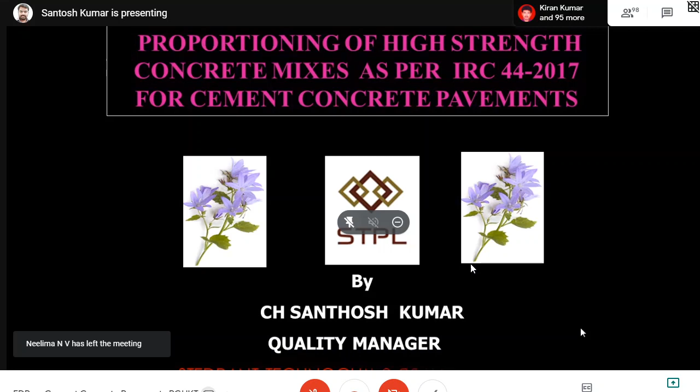Now, I would like to start the presentation with a statement saying that pavements can withstand wheel loads with good quality construction, even though there is marginal deficiency in design. But good design cannot prevent failure of pavements if construction quality is poor.

There are some Indian Road Congress standards related to cement concrete pavements: IRC 15, which deals with the code of practice for construction of jointed plain concrete pavements; IRC SP 46, which provides guidelines for design and construction of fiber reinforced concrete; IRC SP 76, related to white topping; and IRC SP 70. Why have I added this? Because the National Highway Authority of India and Indian Road Congress are permitting self-compacting concrete in the construction of bridges. Then why can't we use self-compacting concrete in pavements, especially when it is a fixed form pavement?

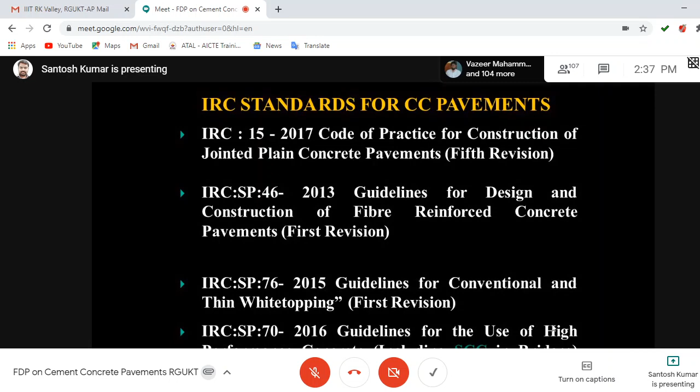Coming to the recent Indian standards related to concrete, published between 2018 and 2020: IS 1199, parts 1 to 7, relate to fresh concrete and hardened concrete testing. You can test for sampling, consistency, density of concrete, air content, making and curing of test specimens. Tests on self-compacting concrete have been introduced, and also the setting time of concrete.

Let me make one thing clear: setting time of cement is completely different, done as per IS 4031. Setting time of concrete is done as per IS 1199 part 7, where you measure the penetration resistance, and based on that penetration resistance, you fix the setting time of the concrete.

IS 10262, the concrete mix proportioning guide, had its second revision published in 2019. One more thing to add is, whenever a new standard is published, the previous standard is subsequently withdrawn. Always follow the new standard when it is published.

You have the water permeability test as per IS 516 in 2018, and IS 516 part 4 for testing of concrete cores. When it comes to pavement quality concrete or cement concrete pavements, concrete cores play a vital role. And IS 516 part 2 section 2...

This was published in the year 2020, dealing with the initial surface absorption test of concrete. And IS 516 part 6 covers drying, shrinkage and moisture movement of concrete, which can also be verified in laboratories.

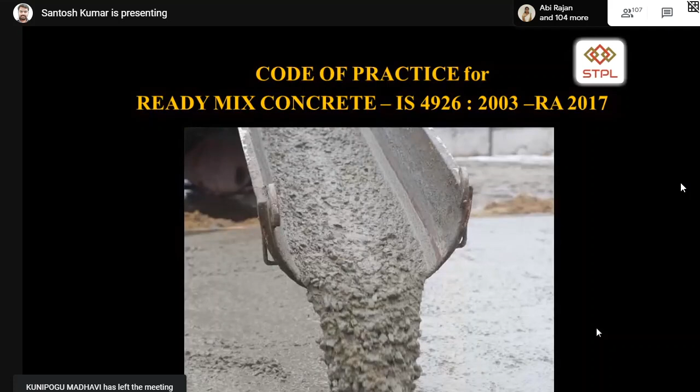Before we talk about high strength concrete, I would like to emphasize ready mix concrete, which is the main source of concrete nowadays for all highway projects, especially dealing with PQC. There is a standard covering the code of practice for ready mix concrete, IS 4926, published in 2003 and reaffirmed in 2017.

So there are some requirements of an RMC plant. Let us see what they are: resource management, plant and equipment, laboratory, key personnel, control on quality of incoming materials, concrete mix design, production and delivery, maintenance, complaints and feedback. These are the main requirements of an RMC plant, and they should have control over all these areas.

Let me give an example of a complaint. When I was auditing an RMC plant in Hyderabad, certified by the Quality Council of India for RMC 9000 capability certification, I looked at the feedbacks and complaints. Most customers write that shrinkage cracks were observed. The complaint is written and recorded in the document.

What the RMC agencies do is write the solution at the bottom: early curing not done by the client or contractor, and because of that, cracks were observed. However, suggestion is given, rectification is done, and the complaint is closed. This is what they write in most of the RMC plants.

But I seriously say this complaint should be taken from another point of view. You should do a root cause analysis - whether there is a deviation in your concrete, or whether it's a problem with the contractor. We have to educate the contractor that early curing must be done, proper measures of damping the surface of the concrete shutter and other things have to be informed to the client. It is our responsibility to ensure there is no complaint related to our RMC.

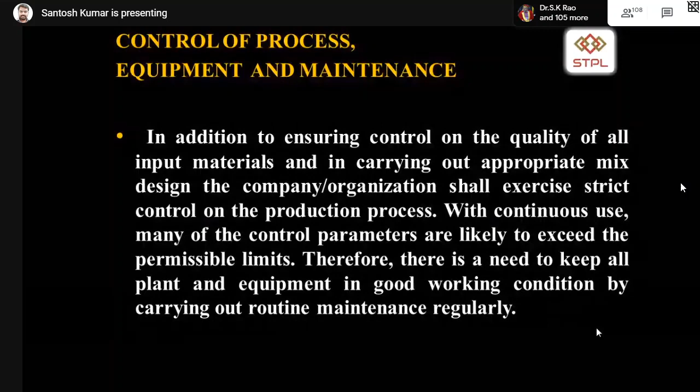There are some requirements for process, equipment and maintenance. In addition to ensuring control on the quality of all input materials and carrying out appropriate mix design, the organization shall exercise strict control on the production process. With continuous use, many control parameters are likely to exceed the permissible limits. Therefore, there is a need to keep all plant and equipment in good working condition by carrying out routine maintenance regularly. Now, if you look into the MoRTH, Ministry of Road Transport and Highways, 5th revision, there is a clause provided in MoRTH 602.

What are the requirements a batching plant should have? A batching plant shall have minimum 4 bins for aggregates, and automatic weighing devices, which are calibrated load cells, should be available.

If you look at IS 4926, the accuracy for water, cement, and aggregates are different, and the MoRTH standard is different too, with more stringent guidelines. Accuracy means if you weigh 100 kg of cement, the tolerance should be plus or minus 1%, it should not deviate more than that. So for cement, admixture, and water weighing, it should be plus or minus 1% accurate. And for coarse and fine aggregate, plus or minus 2% is permissible.

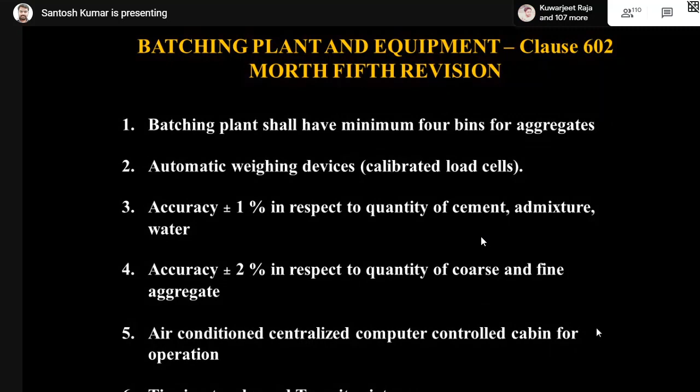An air conditioned, centralized computer control cabin is required for operation of the batching plant. And you should have tipping trucks as well as transit mixers.

Now let me tell you how calibration is verified by an agency. Out of 100 batching plants, 99% are calibrated by the manufacturer. But are we sure the manufacturer is doing the correct calibration of the plant or not? That's why few agencies employ third-party calibration verification agencies. We deploy an engineer at the site, the actual loads applied in the batching plant and the readings observed are noted, and the error is calculated. Only if it is well within the permissible error is the calibration certificate issued.

Tolerance as per IS 4926 is high, plus or minus 3% for aggregates, but as per MoRTH it is only plus or minus 2%. So each standard has its own specifications. For aggregate weighing systems again it's 3%, and for cement weighing system it is 2% here, but as per MoRTH it is only 1%. Then there's water and chemical admixture.

There are a lot of deviations in water and chemical admixture weighing. This is the most important area. When calibration is done, we have to focus more on dispensing of chemical admixtures.

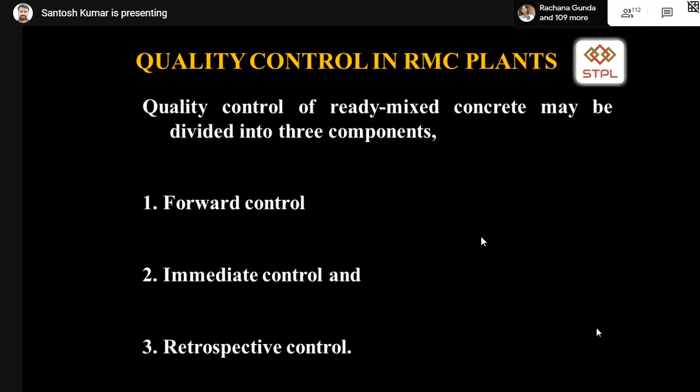Coming to quality control in the RMC plant, there are 3 components: first is forward control, second is immediate control, and third is retrospective control. Let us see what each one is.

Forward control deals with control of purchased material quality. That means never go by brand, sir. Even a centralized, Pan-India presence RMC has appointed Katrina Kaif as their brand ambassador. You don't require brand ambassadors for an RMC plant. You need a proper quality control guy who can maintain your plant. So don't ever go by the brand or the brand ambassador, always test and then approve.

Take the case of legendary cricketer VVS Lakshman, he holds a steel bar and says this is as good as me. But when you test it in the laboratory, it may fail, and sometimes it fails in our laboratory too. So never go by brand. Always ensure all incoming raw materials are tested as per standards and meet the specifications. Only then do you have control on purchased material quality.

Next is control on material storage. Storage plays a vital role in the performance of concrete, we will see in the next slide how storage plays a major role. Then comes mix design and records.

Some batching plants can reset the inputs of the ingredients in the concrete and take a printed batching sheet. But MoRTH, Ministry of Road Transport, doesn't allow a plant which can reset the weights in the batching sheet. So whatever is the actual design should be given in the delivery challan.

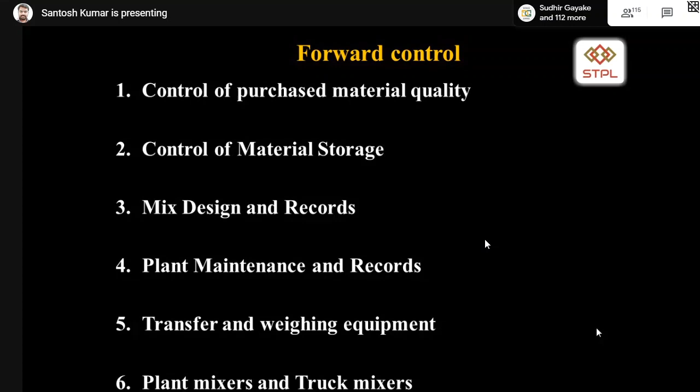Plant maintenance and records cover transfer and weighing equipment, dealing with many kinds of equipment in the plant, mixers, and truck mixers.

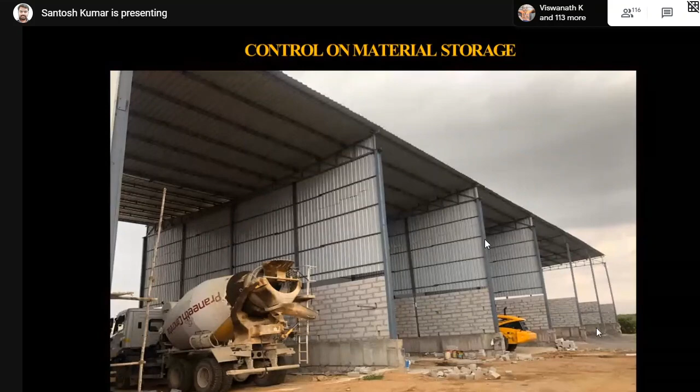This is when I went to an audit of an RMC plant. I suggested that the aggregate should be stored under controlled conditions. This is new, it is under construction. He has provided different compartments for different aggregates. It should be stored in this condition.

Coming to the temperature of aggregates, if you allow the aggregates to rest under direct exposure to sunlight, the temperature may shoot up to 60 to 70 degrees on a hot summer day. This aggregate is mainly basalt, and at an ambient temperature of 40 degrees, the basalt aggregate stone was having a surface temperature of 63.1. If you take the case of granite, ambient temperature was only 40, but the temperature of the aggregate was 54.1. That means based on the type of aggregate, the surface temperature will vary.

He installed the batching plant, and on day one when they started the concrete, they did the trial in the batching plant, and the slump observed was 0. But my mix design report says slump observed is 175 mm. Immediately they added an increased dosage of admixture, and they also increased the water dosage, even though there was 0 slump.

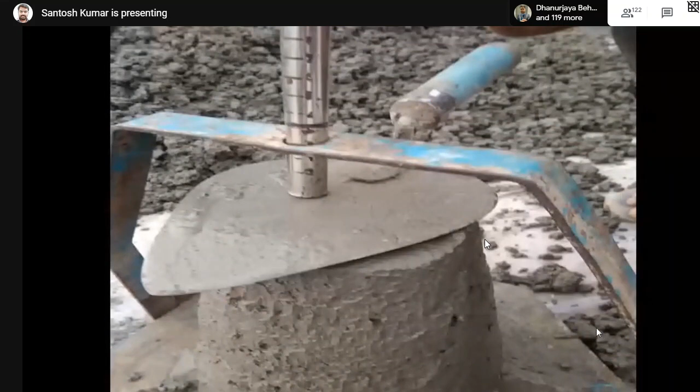Before the concrete is placed at the site, immediate control deals with the mixing and the check for temperature and slump. When it comes to the temperature of concrete, if the fresh concrete temperature is below 25 degrees, the transit time can be up to 120 minutes. If it is above 29 degrees, the transit time should be only 90 minutes.

This is written in the standard. The temperature of concrete plays a vital role, and as per the RMC code, the maximum transit time for concrete is 2 hours when there is no admixture. But if you have any admixture, you can increase it, provided you maintain proper quality control on the concrete. This is a photograph of pavement quality concrete (PQC) being dumped in front of the paver.

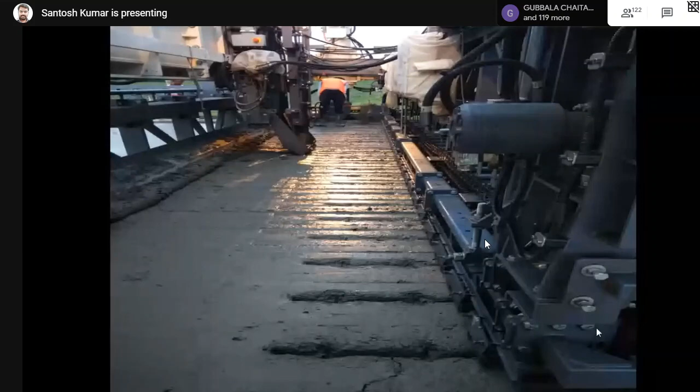It is fed with the backhoe loader, generally called JCB, but technically a backhoe loader, which feeds the concrete into the paver. This is how automatic insertion of dowel bars into the concrete takes place, and this is how the finishing is done. I wanted to show you a video of how the concreting is done, slowed down. It may make a lot of noise because of the paver, so please reduce the volume.

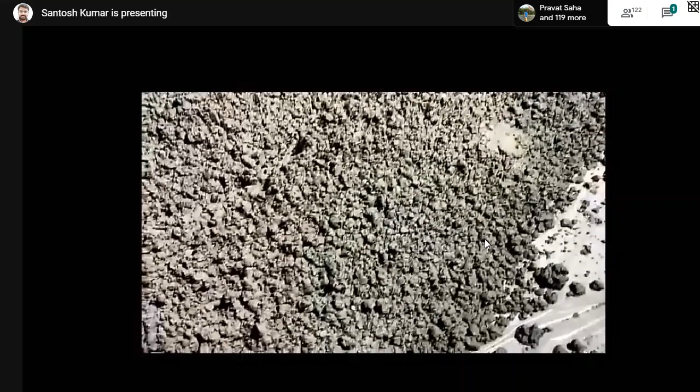This is how the fresh concrete of PQC looks like - very cohesive, and the slump recorded will be around 25 plus or minus 15 mm, not more than that.

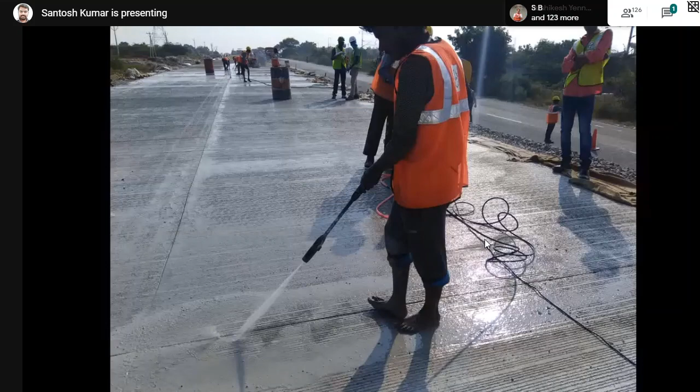This is how the process of finishing concrete is done. On the back side, you can see there is a texturing machine which comes and applies the texture by its own means. You can see here the contraction joints are cut and it is cleaned.

The joints are then filled with sealants, of which there are 3 kinds: polysulfide sealant, polyurethane sealant, and silicone sealant. Filling shall not be done before 21 days of age of concrete - only after 21 days are you supposed to fill the joints using sealants.

After immediate control, we move into retrospective control. Retrospective control is concerned with those factors that influence concrete quality control which cannot be assessed at the time of production. For example, the 28 days strength result - we cannot assure this while producing the concrete, we just predict what the strength would be. This comes under retrospective control, and handling of complaints also comes under retrospective control.

As mentioned by Dr. Surendra Singh sir on the first day of the presentation, the flexural strength is done on a 4-point loading system. This is the flexural testing machine available with our laboratory - it's a 4-point loading system, used for the flexural strength of concrete.

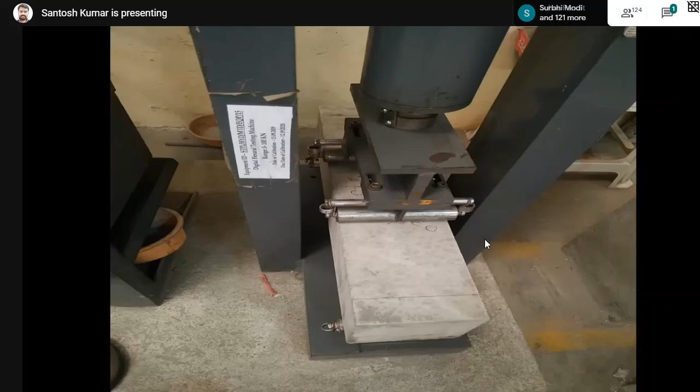The delivery ticket of the RMC should contain many parameters: name, serial number of the ticket, date, truck number, name of the purchaser, name and location of the site, grade of concrete, workability, minimum cement - everything should be mentioned in the delivery challan. Now coming to the recent developments in the concrete industry.

People are expecting high early strength for precast structures. You can see this is M70 grade of concrete with 470 cement. We have deviated from the standard because the designer is not from India and doesn't want to restrict cement content to 450. So based on customer request, we used cement content of 470, and Alcofine we used 100. The water cement ratio was only 0.20 for this grade of concrete.

Imagine, the 24 hour compressive strength was 57.8 Newton per mm square. The request was only 50 MPa, we gave 57.8 MPa at the end of 24 hours. At the end of 36 hours, it was 68.1. At 7 days, it was 82. And at 28 days, it was 96.4.

Let me tell you one thing, sir - for this grade of concrete, the highest recorded compressive strength in our laboratory is 125 Newton per mm square. So high early strength concrete is the order of the day.

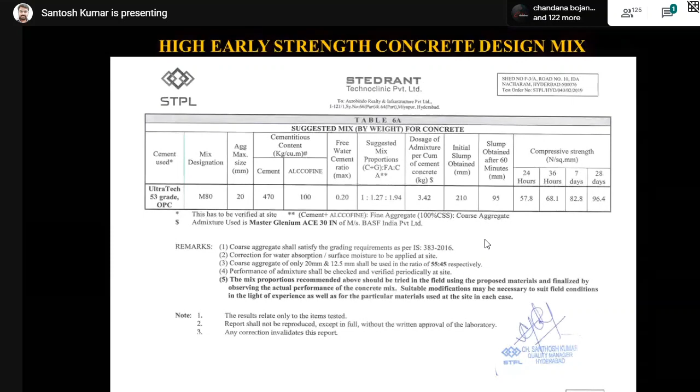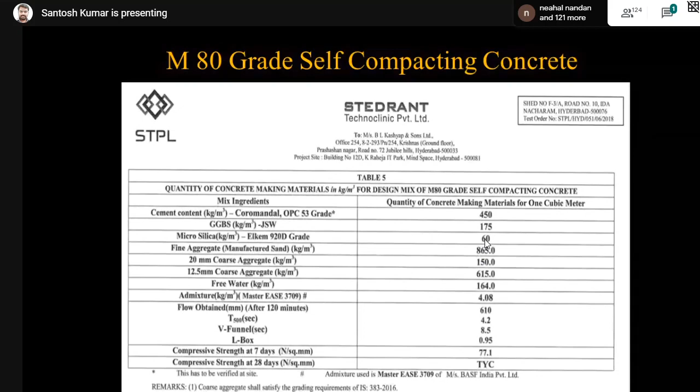The flow should look like a full moon and there should not be any bleeding and segregation.

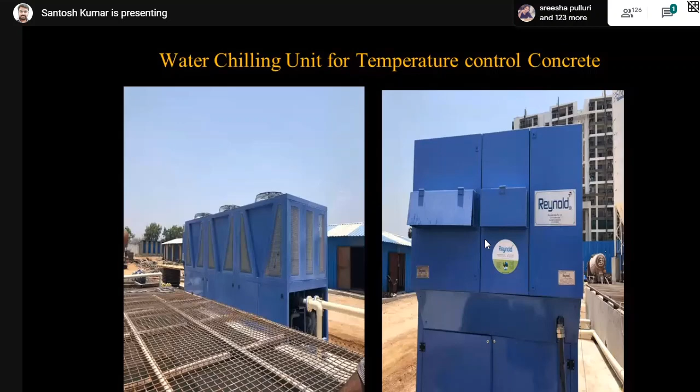Coming to advancements in concrete, people have started using water chiller units, keeping in mind the heat of hydration and temperature rise in concrete. The cost of this chilling unit is around 25 lakh rupees. Temperature monitoring inside concrete has also developed, because if you use pure OPC for at least M40 grade concrete, the temperature inside the core concrete may shoot up to 100 degrees. So monitoring the temperature of concrete has also taken on importance.

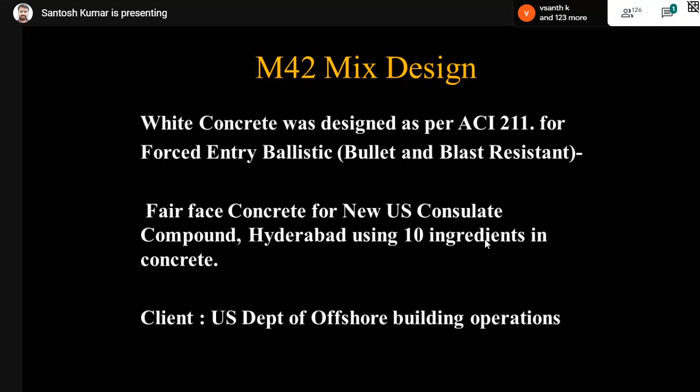You can see the mix design we designed for the US Consulate in Hyderabad. White concrete designed as per American Concrete Institute 211. This is fair face concrete, meaning no plastering and painting. It's white concrete made with 10 ingredients, for forced entry ballistic resistant walls, which we call FEBR walls. If you fire a bullet or missile, the concrete will not collapse, it remains intact. The client is the United States Department of Offshore Building Operations, and this is the mix design.

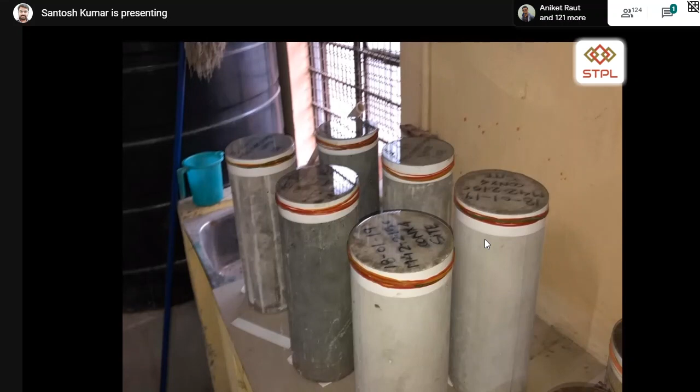We used grey cement, white cement, titanium dioxide, fine aggregate, 19mm and 9mm aggregate, and admixtures like waterproofing chemicals and corrosion inhibitors - many things in one single mix design. You can see the cylinders on the right side of the photograph; the white concrete looks fair enough that there is not even a single pop out on the cylinder sample. This is how the concrete was constructed at the US Consulate in Hyderabad.

When dealing with high strength concrete, in addition to the tests specified in IS 383, suitability of the source of aggregates has to be verified and unconfined compressive strength of rock should be measured. Why? Because some sources of aggregates may have unconfined compressive strength below 60, even though it is granite. If you use such aggregates in high strength concrete, the aggregates may get crushed. So UCS of rock is very important.

Petrographic examination, to see the total structure of the rock, needs to be done under a microscope, and alkali aggregate reactivity tests are also suggested.

The behavior of chemical admixtures, especially in high strength concrete, should be understood by conducting both physical and chemical tests on admixtures as per IS 9103, and performance of mineral admixtures in concrete should also be verified. In high strength concrete, cement and supplementary cementitious materials like fly ash and GGBS may conform to their specifications, but may not attain the required strength development. This is a practical problem we face when designing high strength concrete.

Your cement may give 65 MPa at 28 days, your fly ash comparative strength may be more than 85%, but when mixed in high strength concrete, there may be no result. So we should properly understand how the materials behave and what water cement ratio to adopt, because cement tests are done at a particular consistency value with a particular amount of water added. But in concrete, you don't have control over water - the water cement ratio may vary based on aggregate temperatures, aggregate absorption corrections, and admixture dosages. This should be understood only by doing trials.

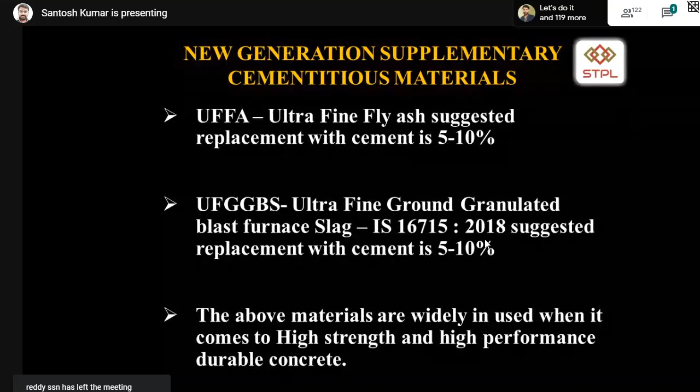These materials are strictly to be used only when dealing with high strength concrete. For ordinary concrete, adding these is a huge loss - the mix becomes uneconomical because they have a very high cost. The cost of cement is about 7 rupees per kg, fly ash 1 to 1.5 rupees, GGBS 2.5 to 3 rupees, ultrafine fly ash 12 to 15 rupees, ultrafine GGBS 20 to 25 rupees, and micro silica will cost 23 to 25 rupees per kg. So these materials should only be used for high strength concrete.

Now we move to chemical admixture.

What are chemical admixtures? Any material other than water, aggregates, cement and additives such as pozzolana or slag and fiber used as an ingredient of concrete or mortar, added to the batch immediately before or during its mixing to modify one or more properties of concrete in the plastic or hardened state.

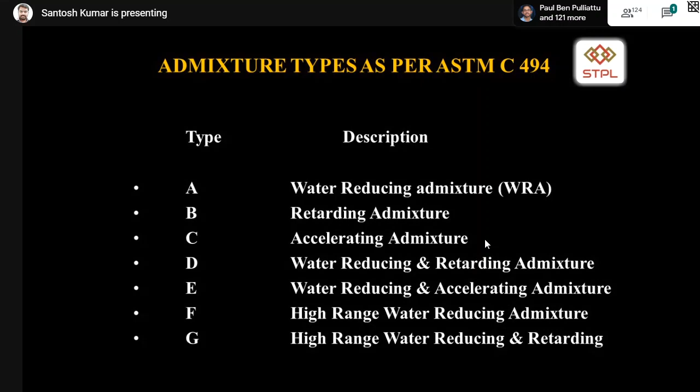There are different types of admixtures. If you look at ASTM C494, there's type A, type B, type F, type G - water reducing, retarding, accelerating, and high range water reducing. But in our country, we call them plasticizer and super plasticizer. They belong to a group of chemical compounds known as dispersants, used to reduce water in the mix design, which increases strength and workability.

How does it increase workability? They are known as dispersants - material added to a solid in liquid suspension to prevent the individually suspended particles from flocculating. So the addition of admixture in concrete disperses the material and increases the workability. Coming to major types of admixture, there are many types in the market, but only two are frequently and regularly used.

One is sulfonated naphthalene formaldehyde based concrete admixture, which can be used up to a grade of M35. These are extracted from pit coal in the tar refinery process, and the water reduction may be up to a maximum of 25%.

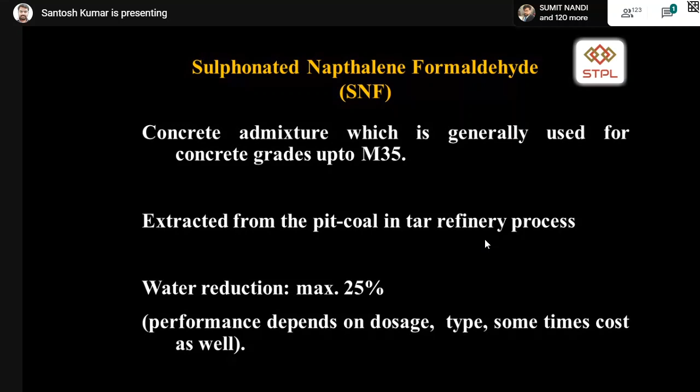The performance of admixtures mainly depends on dosage, type, model, and sometimes cost as well. Consider one brand of admixture costing 50 rupees per kg - if the contractor negotiates with the manufacturer, he may get it for 45 rupees, but they reduce the solid content, which in turn reduces the performance in your concrete. Not all manufacturers do this, but many agencies do, so care must be taken that whatever you order meets your requirements in the field.

Another type basically used is polycarboxylate ether-based admixtures, preferred above M35 grade, based on tailor-made synthetic copolymers. With these, the water reduction can be taken up to 40%.

While buying or using polycarboxylate ether-based admixtures in your concrete, please refer to the product specification or technical data sheet before use in high strength concrete, because if you slightly increase the dosage by even 0.1% by weight of cement, it may lead to bleeding or segregation, especially when used with GGBS and fly ash in concrete. So PCE admixtures are very sensitive and should be thoroughly understood before use.

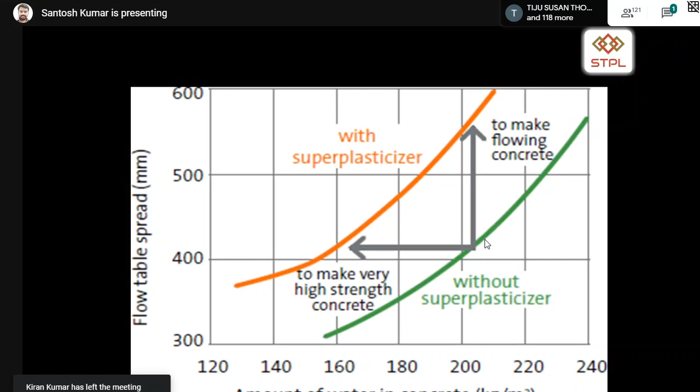Without plasticizer, it takes a lot of water to increase the flow of concrete. But with super plasticizer, the workability or flow can be achieved with minimum water, and that is why these admixtures are compulsory when it comes to high strength concretes.

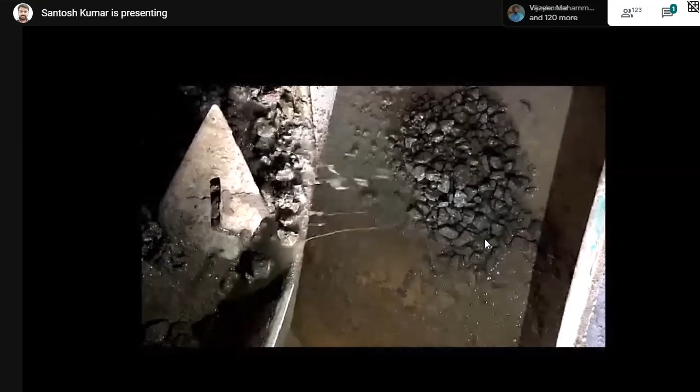If you can see in this video, there is a good mix happening in the drum mixer, but when the concrete is shifted into the trolley, the coarse aggregates are getting separated from the cement matrix. This is mainly because of a problem related to compatibility - when your admixture and cement are not compatible, you face this kind of segregation issue.

This is a photograph of a project I was involved in from the beginning until completion. This was constructed in the state of Gujarat, from Vadodara, Godhra to the MP border road. Earlier it was NH47, now I think it's NH59. It was a 4-lane road project with M40 grade concrete, constructed entirely using natural river sand. The cost of the project was 798 crores, completed in the year 2010, and this is a recent photograph also.

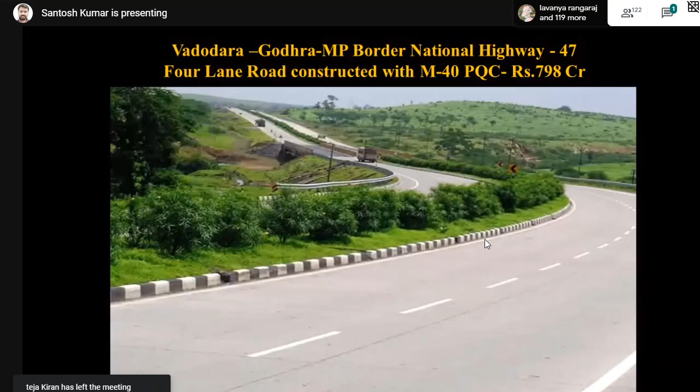Still it is in the same condition. You can see some more photographs. I just wanted to show you.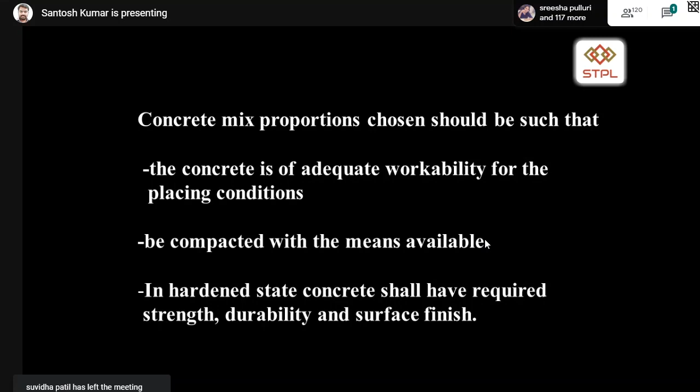So we move on to the actual topic: concrete mix design, which is the science of determining the relative proportions of the ingredients of concrete to achieve the desired properties in the most economical way. The concrete mix proportion chosen should be such that the concrete has adequate workability for the placing conditions, can be compacted with available means, and in hardened state shall have required strength, durability, and surface finish. Not only durability, we need to know more about sustainability also.

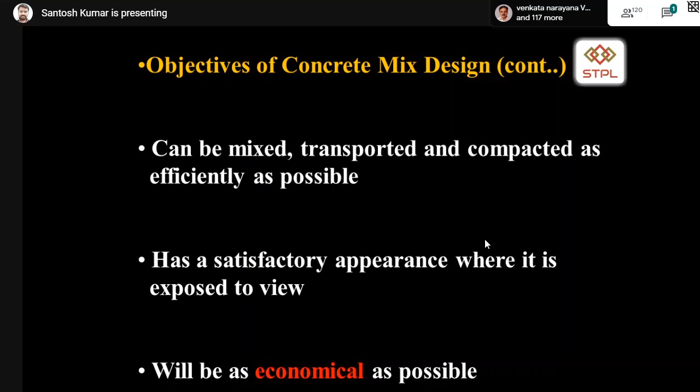Now, the objective of concrete mix design. The objectives are: the concrete mix design should meet the strength requirements, fulfill the durability requirements, and it can be mixed, transported, and compacted as efficiently as possible, and it has to have a satisfactory appearance and should be as economical as possible. When it comes to the process of concrete mix design, there are 3 stages.

First stage, you need to make a practical estimate about the mix based on IRC 44. Once the data is published, you need to take the properties of the aggregates, and then small scale trials shall be conducted in the laboratory. After that, full scale trials shall be conducted at the site before the construction begins.

One thing I want to highlight here is, it is always advisable to design the trial mixes with those materials that will be used in the job site, so that the adjustments can be easily understood and implemented in the field. So what happens is, if you take a practical national highway project, the length of the project will be around 100 km, but the mix design will be 1 for PQC.

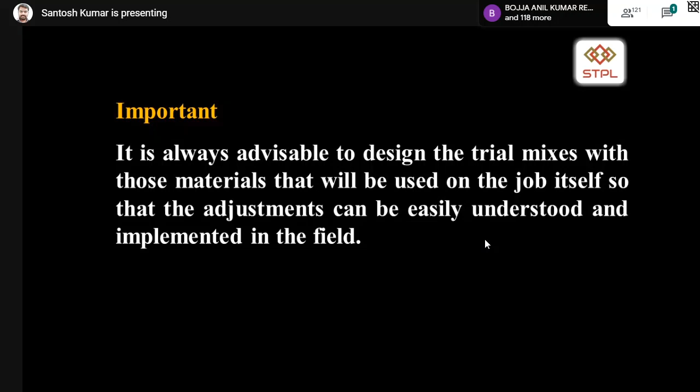It should not be the same. Whenever you change the source of the aggregates, the mix design should vary. So that is more important. I have some contractors who buy the material from Hyderabad and give the mix design, and they do the project somewhere else. That should not be the criteria, sir. Whatever material you are using in your concrete, in your project, the trial shall be done with the same material, so that any corrections can be easily understood.

So mix proportion calculations as per IRC 44. There is some data which has to be required before doing the mix proportions. Early age strength requirement - we have done one mix design for early age for cement concrete pavement. I will show you in the further slides.

So one is, when you are designing the concrete, you need to ask what is the early age strength requirement, do they have it or not. Second is grade, which grade of concrete we are going to design, and based on what criteria we are designing, either by flexural strength or compressive strength. Third is, what is the maximum water cement ratio you allow as per the standard, and what is the minimum cement content, and what is the type of cement we are using - OPC, PPC, PSC or composite, whichever cement you can use. These 4 cements are permissible as per IRC 44.

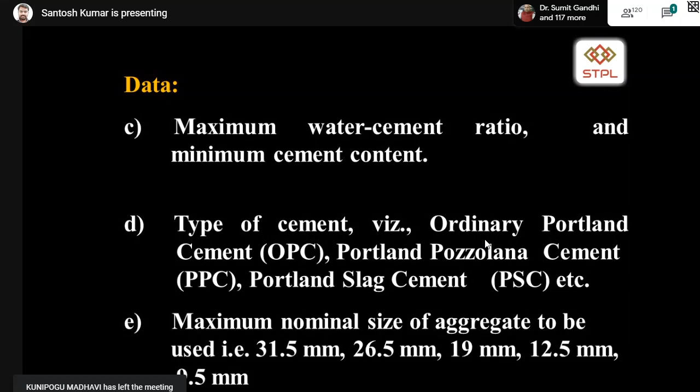And maximum nominal size of the aggregate, 31 to 9.5 mm size, you can choose whichever nominal size you want. But one thing I want to add here, when you are dealing with high strength concretes, lower size of aggregates is most preferable. So maximum cement content, which is 450, degree of workability, retention time, what is the transit time, that should be known before design.

And maximum temperature of concrete. As I told you, if the temperature of concrete is more, the transit time will come down, the placing time will come down. So maximum temperature of concrete should be recorded before the design is done.

So early age strength requirements I already discussed, and type of aggregate. Before using a particular aggregate in your concrete, better get a petrographic examination done. It classifies which type of rock you are using, whether you are using granite, basalt, limestone or sandstone, whatever it may be. And type of aggregates deals with, when it comes to fine aggregates, whether it is river sand or crushed sand.

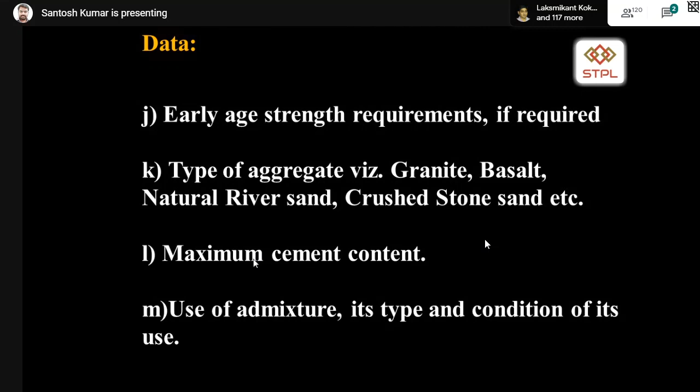One thing I want to focus on here is, people still have a miscommunication about crushed stone sand being used in concrete, but when it comes to the question of high performance, high strength concrete, crushed sand is more preferable than natural river sand. Maximum cement content we already discussed, and use of admixture we already discussed.

Coming to the step-by-step procedure, this is already discussed with you. Target mean strength and standard deviation, it has to be calculated for 30 cubes, already discussed by Surendra sir.

So I don't want to focus more on it.

When it comes to the assumption of standard deviation based on flexural strength, if you want 4.5 to 5.5 Newton per mm square, the standard deviation shall be assumed as 0.4 Newton per mm square. When you design concrete for a flexural strength of 3.5 or 4, the assumed standard deviation shall be 0.35 Newton per mm square. And as I told you, for high strength concretes above M65, when you design as per compressive strength, the standard deviation shall be taken as 6.0 Newton per mm square.

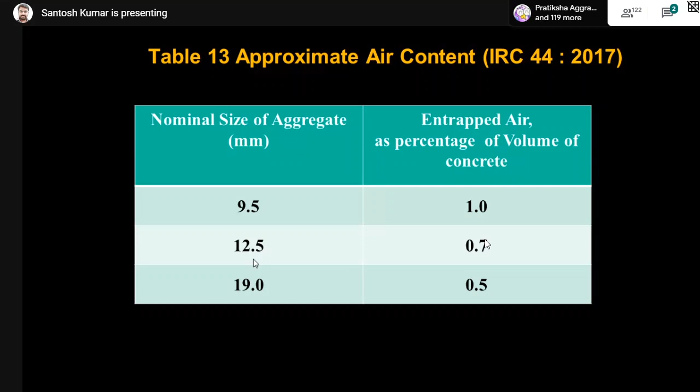Now, air content is available in the concrete. You cannot escape it, as discussed. But one thing you have to note is air content is designed for different grades of concrete in a different dosage. When you deal with lower size of aggregate, that means nominal size of aggregate is 9.5, 12 or 19, the entrapped air percentage is also more. That you have to make it clear.

Selection of water cement ratio mainly depends on different types of cement you are using, supplementary cementitious materials, and aggregates of different sizes, shapes, textures, which produce different compressive strength results in your concrete. Therefore, the relationship between strength and free water cement ratio shall preferably be established for the materials actually to be used. This is table number 15 as per IRC 44, a recommended water cementitious ratio for high strength concrete made with high range water reducing admixtures.

Now, for today's example, I can take the example of compressive strength of 65 Newton per mm square. We are designing the concrete. So if you are using 9.5 mm aggregate, the water cement ratio shall be taken as 0.36. This is a tentative guideline, sir, it doesn't mean you have to fix to this. You can even further reduce the water content, but you can increase it slightly more also.

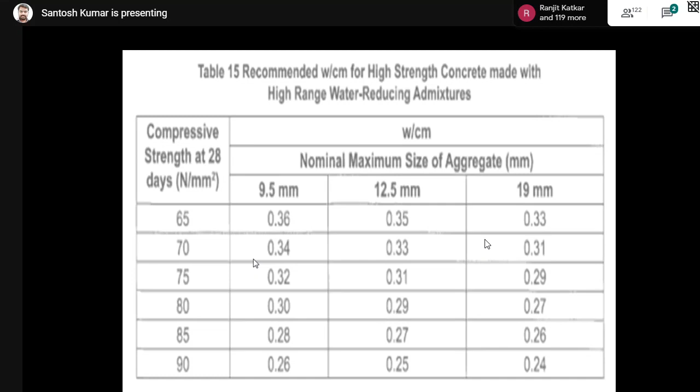Please see to it that you are adding the minimum water required for the hydration process. Don't go for a very low water cement ratio, because there is some quantity of water which is required for the hydration process. Now, selection of water content.

Water content per unit volume of concrete is influenced by many factors such as aggregate shape, size, texture, water cement ratio, cement and other mineral admixture type and content, chemical admixtures, and environmental conditions. An increase in aggregate size, a reduction in water cement ratio and slump, and use of rounded aggregates and water reducing admixture will reduce the water demand.

On the other hand, increased temperature, higher cement content, higher slump requirement, higher water cement ratio, aggregate angularity, and decrease in proportion of coarse aggregate to fine aggregate will increase the water demand.

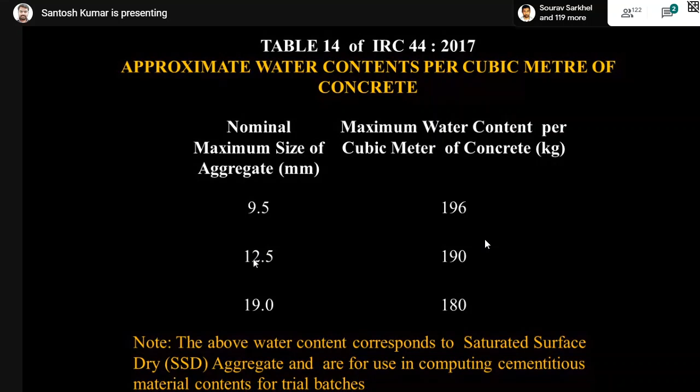The quantity of maximum mixing water content should be as per the table given in the IRC standards. You can see here, this is table 14 of IRC 44. If you are using 9.5 mm aggregate as your nominal maximum size, the water, when taken in the surface saturated condition of the aggregate, should not exceed 196 kg. In the same case, if you are dealing with 19 mm aggregate as nominal maximum size, the water content shall not be more than 180 kg per cubic meter.

Now this is a generalized water cement ratio versus strength graph. We all know as the water cement ratio reduces, the strength will increase. So reduction in water content can be made in the following cases.

By using subangular aggregates, you can reduce the water estimate by 10 kg. For gravel with crushed particles, you can reduce by 20 kg. For rounded gravels, you can reduce by 25 kg. For higher workability, other than 25 to 50 mm, the required water content may be established by trial and error, increasing by 3% for every additional slump increment of 25 mm. The same applies when you want lesser slump also. You have to reduce by 3%. If you want additional 25 mm slump, you increase water by 3%. If you want 25 mm less slump, you reduce water by 3%.

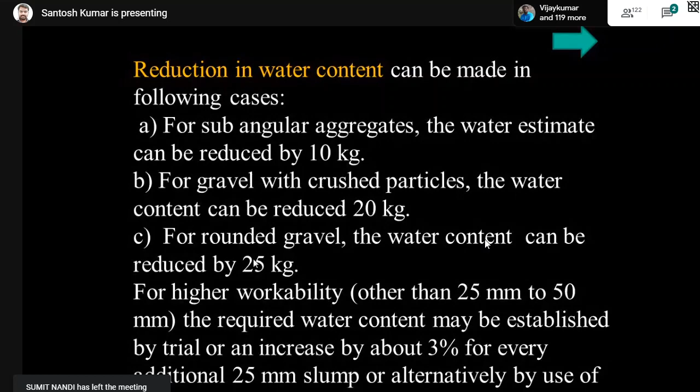So, calculation of cementitious content. The cement content and mineral admixture content per unit volume of concrete, together called cementitious content, may be calculated from the free water cement ratio and the quantity of water per unit volume of concrete. The total cementitious content so calculated shall be checked against the minimum content for requirements of durability, and the greater of the two values adopted. So we all know 450 kg is given in IS 456, and the same is implemented in IRC 44 also.

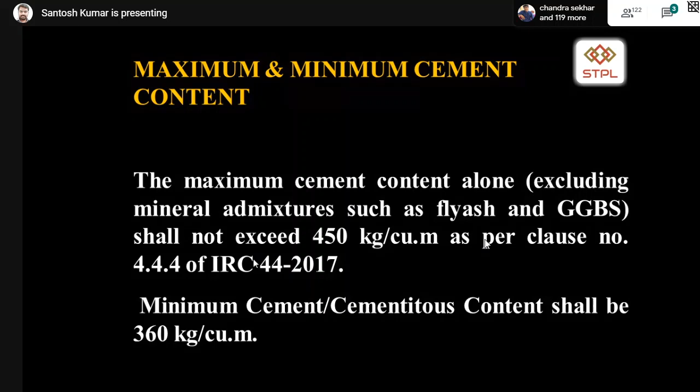Whereas minimum cement content shall not be less than 360 kg when it comes to pavement quality concrete. Use of mineral admixture - we know it is 25% for fly ash, but when you use high strength concrete, a lower limit is also given, 15 to 25%. In that case, minimum pure cement content should be 310 OPC. And if you're using GGBS in your high strength concrete, prefer a lower dosage, 25 to 50% is permissible, and minimum pure cement OPC shall be 250 kg per cubic meter.

Chemical admixtures we have already discussed. Based on the type and performance, you can vary the dosage from 10 to 40% based on the admixture performance.

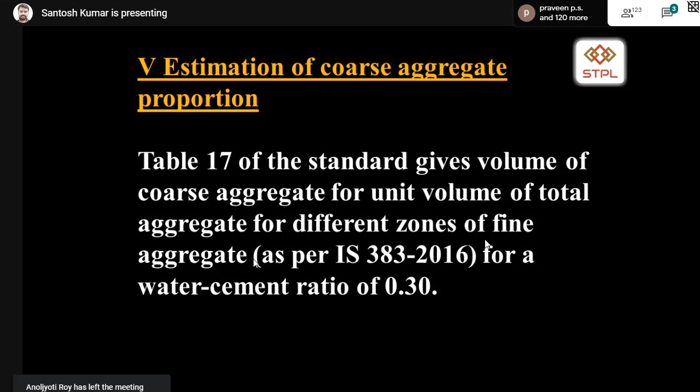Estimation of coarse aggregate is done from Table 17 of IRC 44, given for a water cement ratio of 0.30 based on the zone of sand, which we discussed earlier. If your sand is conforming to zone 2, and you're using 19 mm coarse aggregate, the volume of coarse aggregate shall be 0.70. This is how it is adopted.

For most concrete constructions, we use nominal size 19 mm. Coarse aggregate from stone crushers is nominally available in two sizes, 20 mm and 10 mm, or sometimes 12.5 mm. Coarse aggregates of different sizes can be suitably combined to satisfy the graded requirements as per IRC 44. If you look into the grading chart for pavement quality concrete given in IRC 44, based on the maximum size of aggregate, different grading requirements are given - and this does not conform to the requirements as per MoRTH, which has some other gradation requirements. So before entering a project, the tender specification should clearly specify whether the PQC is going to conform to IRC 44 or MoRTH standard. Accordingly, our mix design should be arrived at.

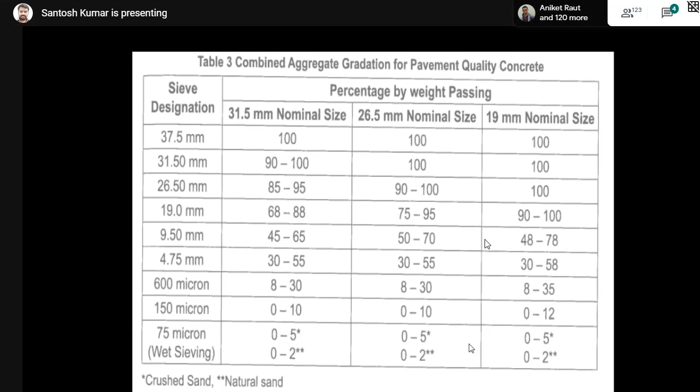When it comes to fine aggregates, use of crushed stone sand instead of river sand is increasing. The gradation of such crushed sand needs to be monitored carefully, because if the 150 micron passing is beyond 20%, there's a chance of shrinkage cracks in your concrete. Shrinkage happens not only because of fines in fine aggregate, but also if the wind velocity at the construction site is more than 5 km/h - and most highway projects are done in open areas where wind velocity is high. If wind velocity is more than 5 km/h, there's definitely shrinkage cracking in your PQC. So these problems have to be taken care of, with additional care for shrinkage. But manufactured sand can also be used.

I just wanted to focus on this - here's an example of concrete mix design of M65 grade based on compressive strength. I just want to tell you how it is calculated. The grade of concrete designation is M65.

Cement we are using is OPC 53, conforming to IS 269. Silica fume conforms to IS 15388. Nominal size of aggregate is taken as 19 mm. Minimum cement content is 360. Maximum water cement ratio is 0.4, and workability requirement is 15 to 35 mm. Degree of supervision is good, and the type of aggregate is crushed angular aggregate. Maximum cement content is 450 kg per cubic meter, and the chemical admixture used is super plasticizer.

Coming to the data, specific gravity of cement is 3.15 - we have to perform this test. In most cases I see the cement specific gravity is assumed to be 3.15. No sir, the cement specific gravity of OPC cement varies from 3.05 to 3.15, or sometimes 3.03. You cannot directly take cement specific gravity as 3.15, because specific gravity plays a major role in concrete mix proportioning. So specific gravity of cement shall be done using Le Chatelier's flask.

Specific gravity of silica fume will be around 2.2. Chemical admixture conforms to IS 9103. Specific gravity of coarse aggregate is taken as 2.74 in this design, and fine aggregate specific gravity is taken as 2.62. Coarse aggregate water absorption is taken as 0.5%, and fine aggregate water absorption is taken as 1%. But one thing I want to tell you - the 1% fine aggregate value in the standard referred to in this example is only for river sand.

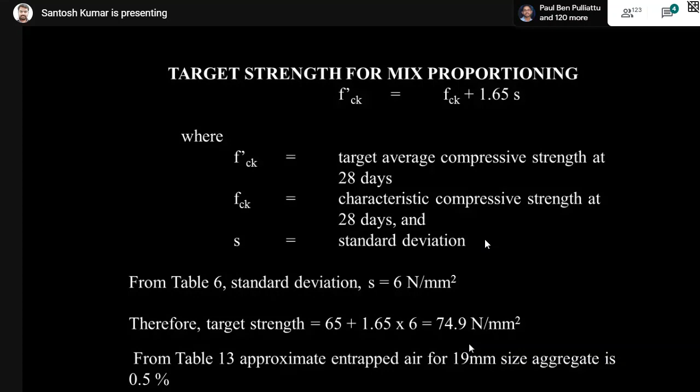Target mean strength for this M65 grade is 65 plus 1.65 into 6, which is 74.9. In this case, entrapped air for 19 mm size is approximately 0.5% as per table 13, so we are assuming the air content as 0.5%.

So selection of water cementitious ratio. Again, this table 17, as I told you, is given for a water cement ratio of 0.30. We are using in this design 0.29. So for selection of water content, the maximum water permissible in table 14 is 180 kg per cubic meter for a slump range of 50 mm.

But we need 25 mm slump, 15 to 40 mm is required. We don't require 50 mm slump. So for reduction to 25 mm slump, the estimated water content will be 180 minus 3% of water, which becomes 175 kg per cubic meter.

As superplasticizer is used, we are using a polycarboxylated ether based admixture, we can reduce up to 30% of water. So 175 liters reduced by 30% becomes 122.5 kg per cubic meter, which is nothing but 123 kg per cubic meter.

So water cement ratio taken in this case is 0.29. Cement content is 123 divided by 0.29. 123 is the water content and 0.29 is the water cement ratio. So water divided by water cement ratio gives you the cement content, which is nothing but 424 kg per cubic meter.

In this case, being a high strength concrete, we are using silica fume at the rate of 5%. So 424 multiplied by 5% gives you 21 kg of microsilica. That 21 kg shall be removed from the total cementitious content of 424 kg. That means your pure cement content will be 403 kg and your silica fume is 21 kg per cubic meter.

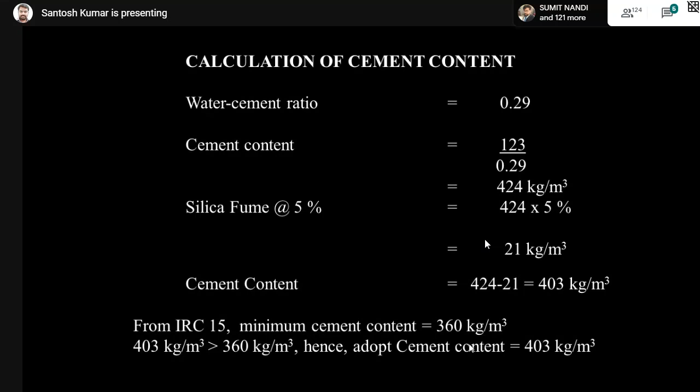If you look into the requirements as per IRC 15, minimum cement content is 360, which we are well exceeding, and 403 kg is greater than 360, so we can adopt the cement content as 403.

Coming to the proportion of volume of coarse aggregate and fine aggregate content. As shown in the earlier slide, table number 17, volume of coarse aggregate corresponding to 19 mm size of aggregate and fine aggregate conforming to zone 2 for water cement ratio of 0.30 is 0.70.

If you want, I can take you back to the slide. Yes, you can see here, this is the volume of coarse aggregate for a water cement ratio of 0.30. Zone 2 sand, 19 mm aggregate, it is 0.70 as per the table. That is what we have taken in the design. So here it comes as 0.70.

As the water cement ratio is 0.29, the table is for 0.30, so the design calculation will vary. So instead of 0.70, we will take 0.702 to reduce sand content. How does this 0.702 come into picture? A small calculation: 0.3 is the water cement ratio suggested in the table, but we are using 0.29. So 0.3 minus 0.29 divided by 0.05, into 0.01, plus the volume of coarse aggregate which is 0.70 — if you multiply, it comes to 0.702. That is the volume of coarse aggregate in your concrete.

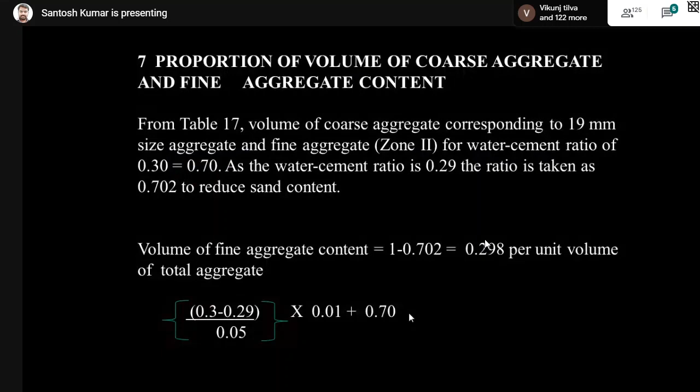Now volume of fine aggregate is nothing but 1 minus coarse aggregate volume, which is 0.298. This is the volume of fine aggregate. Now we calculate the absolute volume of concrete by removing the air content. The volume of air, 0.5 percentage of air means volume is 0.005. So 0.995 is the total absolute volume of your concrete. So volume of cement is calculated by mass of cement, which is 403, divided by the specific gravity of cement, multiplied by 1 by 1000.

That means you arrive at the volume of cement as 0.128 cubic meter. Now volume of silica fume: weight of silica fume 21 kg divided by specific gravity of silica fume multiplied by 1 by 1000. That gives you 0.010 cubic meter of silica fume.

And volume of water, weight is 123 divided by the specific gravity 1, you get 0.123 cubic meter of volume.

When it comes to the chemical admixture, we are taking 0.8 percentage, but practically polycarboxylated ethers can be designed at 0.4 percentage only. This example follows the standard, so I have taken 0.8, but 0.4 is more than enough when it comes to present day polycarboxylated ether based admixtures.

So the mass of this chemical admixture is 0.8% of total cementitious content. 3.4 divided by specific gravity of admixture, 1.08, gives you the volume of chemical admixture as 0.003 cubic meter.

The volume of all-in aggregate is calculated by the absolute volume minus cement volume, microsilica volume, water volume, and admixture volume. So if you remove cement, microsilica, water and chemical admixture from the absolute volume, you are left with the volume of aggregates. This 0.731 cubic meter is the volume of all-in aggregates.

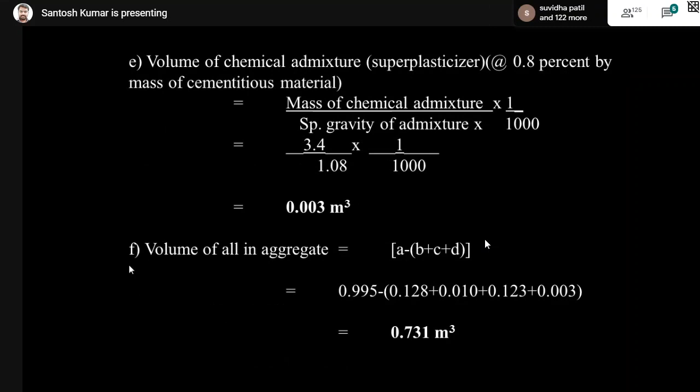So out of that, how to calculate the mass of coarse aggregate? The volume of all-in aggregate is F, which is 0.731 cubic meter. F multiplied by volume of coarse aggregate multiplied by specific gravity of coarse aggregate multiplied by 1000. So F is 0.731, multiplied by volume of coarse aggregate 0.702, multiplied by specific gravity considered at 2.74, multiplied by 1000. So the mass of coarse aggregate is 1406 kg per cubic meter.

Sir, proportions should fit as per the gradation requirements of PQC. The mass of total coarse aggregate is 1406. The proportion you have to design based on the gradations.

Mass of fine aggregate is again based on all-in aggregate weight, that is 0.731. Volume of all-in aggregate, 0.731, multiplied by volume of fine aggregate, 0.298, multiplied by specific gravity of fine aggregate, 2.62 considered, multiplied by 1000. That gives you the weight of fine aggregate as 571 kg per cubic meter.

That's it, your high strength concrete design is completed. Cement content you have taken 403, silica fume 21 kg, water 123 kg, fine aggregate 571, coarse aggregate 1406, chemical admixture 3.4 kg per cubic meter, water cement ratio 0.29. Your mix design is completed.

But here you should understand one thing: aggregate should be used in saturated surface dry condition. So this mix design is done as per aggregates in SSD condition. If the aggregates are not in SSD condition, you need to do some water absorption corrections. Now, how to do the water absorption correction?

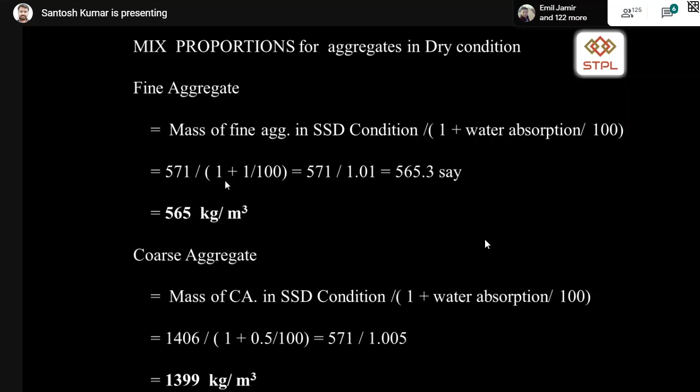So again, if you calculate the proportions in dry conditions, we can see the water is increased. Instead of 123, you are taking 136 kgs. 6 kgs extra water is added, which is absorbed by fine aggregate, from 571 minus 565 becomes 6. So fine aggregate is reduced by 6 kgs, and the same 6 kgs is added to the water content. In the same case of coarse aggregate, 7 kgs you reduce in the weight and add to the water content. That becomes your mix proportions as per dry condition.

And one thing I want to tell you here, sir: leave alone national highway projects, they maintain proper quality control. But in local constructions, in sites of low volume concretes or CC pavements in the cities, there is no absorption correction.

If it rains, reduce water by 10 liters. If there is no rain, they add 10 kgs of water. This is a simple thumb rule they take, but it should not be accepted.

Each and every hour the aggregate shall be monitored for moisture and water absorption corrections. The slump shall be measured and the water content and dosage of admixture shall be adjusted for achieving the required slump. Based on the trial, if required, the mix proportion shall be reworked for the actual water content and checked for durability parameters.

Two more trials have to be conducted with a variation of 10% in the water cement ratio, and the strength shall be plotted. The optimum mix design has to be reported to the customer, or used at the site. So another example I wanted to show you is for a normal M40 grade of concrete based on flexural strength.

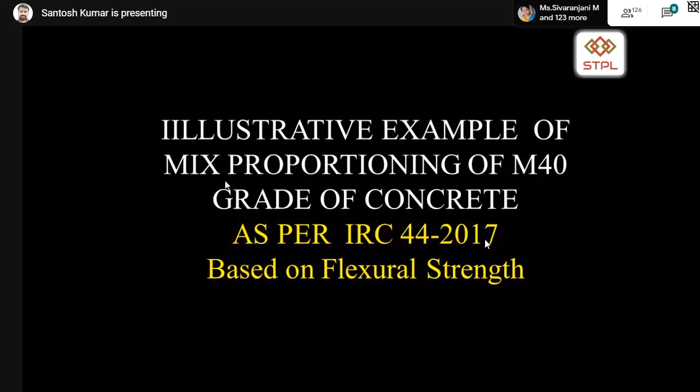The flexural strength grade is designed for 4.5 Newton per mm square. Cement considered here is OPC 43. Nominal maximum size in this case taken is 31.5. Minimum cement content is 360. Maximum water cement ratio is 0.4, and slump is again 15 to 35 mm desired.

All other things are the same, and if you can see, the specific gravities and the absorption properties are the same. So you can see the target mean strength for M40 grade of concrete in terms of flexural strength will be 5.16 Newton per mm square.

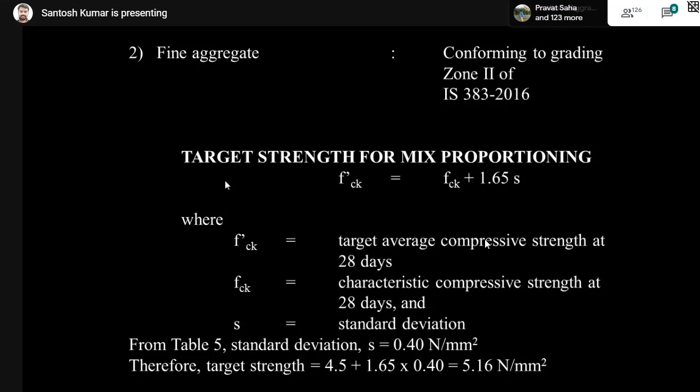So again, in this case, you have to reduce the water by 3%. Here what we have taken is the water cement ratio of 0.32, and the slump value is designed for 50 mm in the table, but in our mix design it is designed for 25 mm. So we have to reduce by 3% water. Water becomes 160, and when you are using normal super plasticizer, it may reduce up to 20%.

So 160 liters again I reduce by 20%. It becomes 128 liters. So the cement content is calculated by weight of water divided by water cement ratio, which gives you the cement content, which is nothing but 400 in this case. So it is greater than the 360 mentioned in IRC, so the cement content is satisfactory.

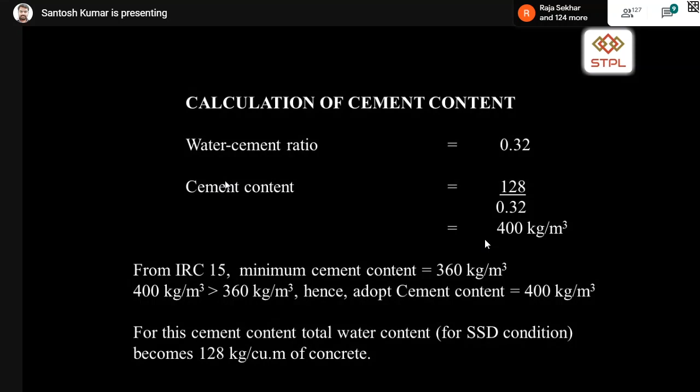So what we do is take the volume of coarse aggregate and volume of fine aggregate. One thing I want to tell you, sir, in this design, the table number is different. Table number 11, but in that design it was table number 15, I suppose. Based on the size of the aggregate and the strength of the concrete, you have to change the tables. So in this table, we have taken accordingly the coarse aggregate proportion as 0.686 after corrections.

So volume of concrete is 1, and the air content is here 0.8%. So volume of cement comes to 0.127 meter cube, that means cement weight by specific gravity of cement, and volume of water is 128. Volume of chemical admixture is 0.0033, and volume of all-in aggregate becomes 0.7337 here.

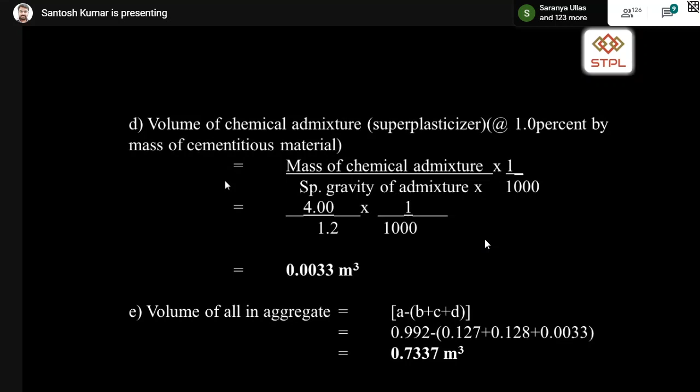I think it is clear the volume of all-in aggregate is 0.992, the absolute volume. From that you have to remove the weight of cement, water, and chemical admixture. Here there is no microsilica, sir, it is pure cement. So the volume of all-in aggregate becomes 0.7337.

So 0.7337 is multiplied by the volume of coarse aggregate 0.686, multiplied by the specific gravity of coarse aggregate, multiplied by 1000. The mass of coarse aggregate is 1379 kg, and in the same fashion mass of fine aggregate is 604 kg. Your mix design is done. The water cement ratio is 0.32 and the cement content is 400 kg per cubic meter.

So details of M60 grade pavement quality concrete, trial done in Stedrant laboratory. This is a mix design which we have done practically at a site, I can say. You can see here in this mix design we have used 25 mm, 12.5 mm river sand and crushed sand in different proportions, and you can see the mix design.

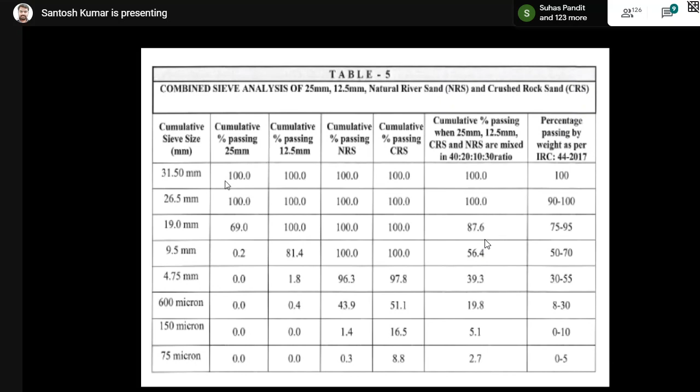Cement content was taken as 425 kg. Microsilica taken was 45 kg. Water cement ratio was 0.28. The proportion of concrete was 1:1.57:2.39, and this concrete was designed for flexural strength.

The authority, Hyderabad Road Development Corporation, required the concrete to attain flexural strength of 5 Newton per mm square at the end of 48 hours, because after 2 days they want to allow traffic to move on the road. So they requested us to do a high strength concrete mix design of M60 grade so that they can allow the traffic within no time.

So we have designed the concrete with micro polymeric fibers, and the concrete's flexural strength was satisfactory.

So we have given the mix design, and this is a photograph of the 6-lane road project in Hyderabad, Khajaguda Nanakramguda road. If you can see here, the median is big, and beside the median there is a paver block provision of M60 grade. The paver blocks are there up to a length of 1.5 meters, so that in the near future, if there is a metro line going on that road, there is no problem to the PQC design. This is how they have done it in Hyderabad.

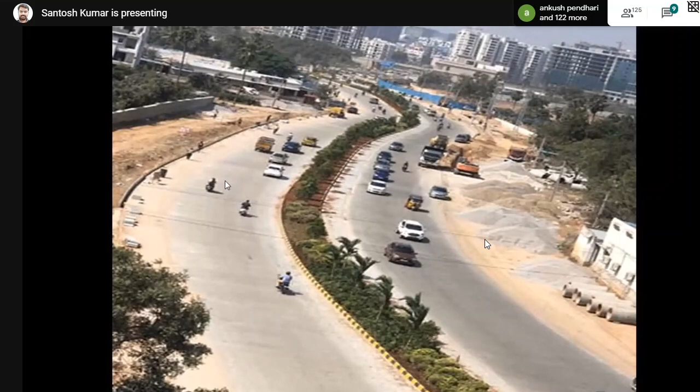Coming to the problems associated with rigid pavements, I don't call it distresses since that topic is already discussed. There is a problem of carbonation of concrete in rigid pavements. Emission of carbon dioxide from vehicles is a factor of concern not only for the environment but also for cement concrete pavement. Carbonation of concrete is a process by which carbon dioxide present in air penetrates into the concrete pavement and reacts with calcium hydroxide to form calcium carbonate. Carbonation reduces the alkalinity of concrete.

Concrete, when freshly cast, is highly alkaline. The pH value of concrete will be 13 to 14 for freshly laid or freshly hardened concrete. But once the concrete is carbonated, the pH value comes down to 8.3 to 9. Your pH value being down means your concrete is not alkaline. Because of this carbonation, let me make one thing clear, sir: the absolute volume of concrete will remain the same, but inside the concrete the pores will increase because of carbonation. The calcium hydroxide in your concrete creates pores when it is carbonated.

This forms a passive oxide layer on the dowel bars and tie bars, thereby protecting the steel from corrosion. If your concrete is highly alkaline, it protects the dowel bars and tie bars. If the concrete is not alkaline, i.e. it is carbonated, this layer will be broken and corrosion will set in.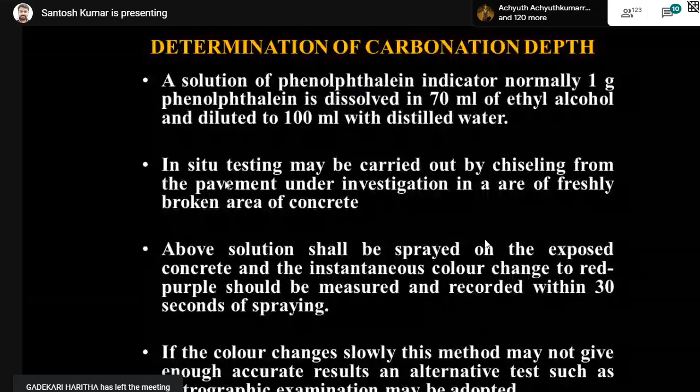If the color changes slowly, this method may not give accurate results of carbonation, and alternative tests like petrographic examination should be adopted. Now, if you spray the solution, the concrete turns pink, or red-purple. If it changes color immediately, before 30 seconds, then your concrete is alkaline and not carbonated. If there is no change, the concrete is carbonated and your concrete is sick.

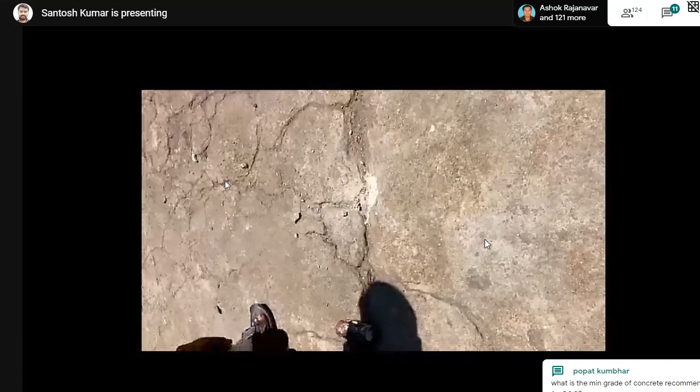I just want to show you a video which we have done on the pavement. You can see here, in front of our laboratory, we have chipped the concrete on the surface of the pavement and sprayed this phenolphthalein solution mixed with ethyl alcohol and distilled water. You can see there is no change in color, which means your concrete is carbonated.

Now we'll go and see a curbstone which we got for testing. On this edge of the curbstone, we make a small break, and then we spray this solution. You can see it blushes into red-purple color, which means this is newly laid concrete and has no carbonation.

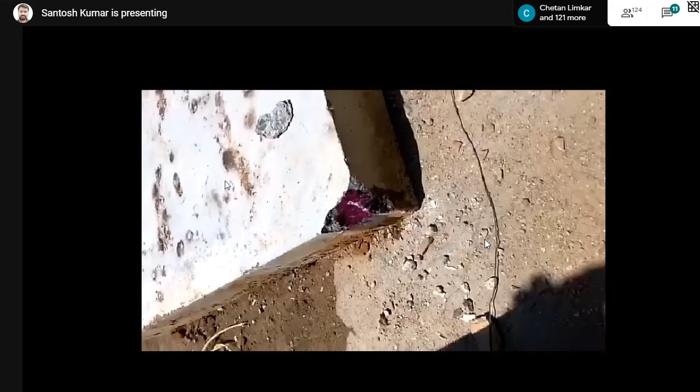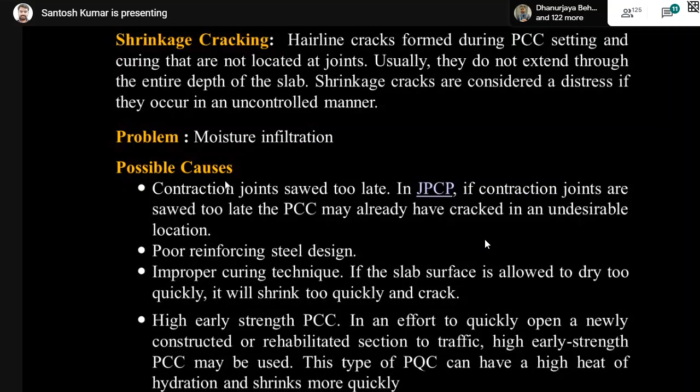Some other problems related to rigid pavements include surface wear. Freshly laid concrete shows surface wear because of lack of strength. You can also see shrinkage cracks in concrete, and there are a lot of problems related to shrinkage cracks, as already discussed. If the contraction joints are delayed, there may be chances of shrinkage cracks, and they have to be addressed properly.

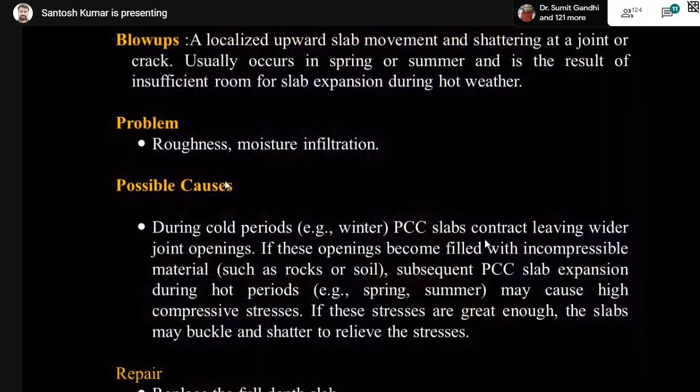This is also one of the distresses, I can say: mud pumping, or pumping of water underneath the pavement. It breaks the concrete slab, and there are corner breaks and linear cracks observed. There are also some blow-ups due to temperature variations inside the concrete, which can be rectified by removing and replacing the entire panel. Some linear cracking is also seen, with related problems.

Coming to the good practices while dealing with concrete, please remember, don't let the concrete dry. It should be saturated, or cured for a minimum period of 7 to 14 days. When using supplementary materials, minimum curing period should be 14 days. Dry concrete is equal to dead concrete, as all the reactions will stop.

Some people apply curing compounds on top of the pavements. Yes, that is agreeable, but the performance of the curing compound must be ensured. The purpose of applying curing compound is that the water we design in the concrete is self-sufficient to meet the curing requirements. That is why it is applied, so the water inside the concrete can take care of the curing. So please don't let the concrete dry, you cannot revitalize it once it dries, and keep the temperature at a moderate level.

Concrete with supplementary cementitious materials requires continuous and consistent good quality curing. As I told you, always use aggregates which conform to IS 383. Prefer weight batching always, don't prefer volume batching. And coming to the conclusion, mix proportions of concrete mixes shall be based on trial mixes only. Computer software or mathematical modeling can only help arrive at the proportions for the preliminary trials. It is proper understanding of the constituent materials of concrete that forms the basis of mix proportioning.

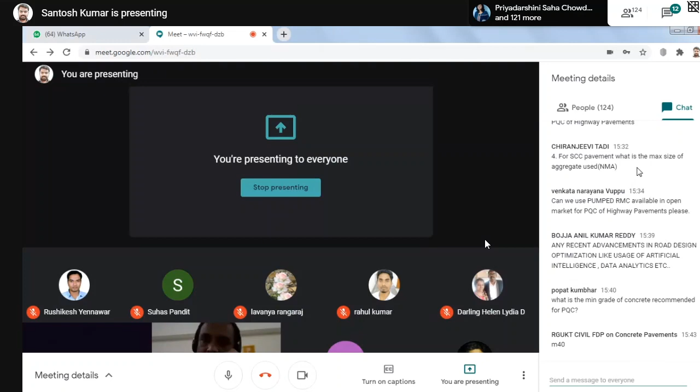Sir, actually your voice is low. I am opening, sir, just let me open the chat box. Yeah, Santosh, now okay. Yeah, sir, I have opened the chat box. 311, 311, one second, let me go to the top. 311, yes.

Can vacuum dewatering system be used in cement concrete pavements of highways? Yes, absolutely sir, because vacuum dewatering concrete pavements are being used in Hyderabad, especially by HMDA, the Hyderabad Metropolitan Development Authority. They are using the vacuum dewatering system. Yes, we can use vacuum dewatering in highways also, but proper control on the dewatering process should be there.

The second question is, can RMC with pumping method be adopted in open market or recommended for PQC for highway pavements? Yes, it is not recommended or mentioned anywhere, but when it comes to concrete in fixed form, you can make pumping arrangements, but the concrete slump should be as low as possible. To be frank, you don't require high slump to pump the concrete.

It is the pressure of the pump which is more important when you pump the concrete. Normal pumps can be used to pump concrete in fixed form pavements, but the slump should be minimum and the pump pressure should be desirable. You should not go for the highest pump pressure because there may be chances of segregation in your concrete. We can use it, sir, but most of the time our Indian standard guidelines will only give you the guideline. At the end of the day, it is the engineer in charge at the site or the department engineers who take a call whether to go with the conventional concrete laying method or slip form concrete. It's up to the engineer in charge.

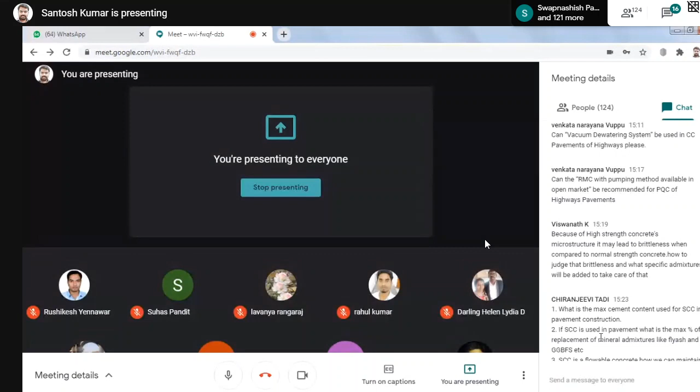What is the maximum cement content used in SCC? Actually, there is no standard which talks about SCC in pavement construction, but 450 kg per cubic meter is the maximum cement content. When it comes to high strength concrete, additionally you have to add supplementary cementitious materials so that you keep this 450 kg intact.

If SCC is used in pavement, what is the maximum percentage of replacement of mineral admixture? I have already told in the presentation. You can use up to 25% in the roads, GGBS 50%.

SCC is a flowable concrete. How can it maintain the camber and gradient? For that, sir, you have to take fixed form pavements. And in those cases, the flow should not be more. There are three slump flow classes: SF1, SF2, and SF3. SF1 is 550 to 650 mm flow, SF2 is 650 to 750 mm, and SF3 is 750 to 850 mm. If you take the case of SF1, the flow is less, so there you don't have any problem related to camber maintenance. Once your levels are intact, you should have an auto level to check the levels also. That maintains all your camber requirements.

Can we use pumped RMC available concrete? No, sir, it is not suggested. Pumped concrete means minimum slump of 100 mm, but in the pavements it is not so advisable.

Any recent advancement in road design optimization, artificial intelligence in the design as such, no. Data analytics, I can say, maturity of concrete can be measured using softwares. You can place thermocouples inside the road along the entire length of the project, and you can see the maturity, strength development versus the temperature. You can plot it, but it's very costly. You can sit in your office and see what is happening in the road concrete, there is software for it. It's very expensive, but there is no standard which talks about it. Definitely in the near future, in the next coming 10 years also, there is no other material which can replace concrete. So in future we may use this data analytics and software to monitor strength development in concrete, but trust me, they are very expensive.

What is the minimum grade of concrete recommended for PQC? It is M40, sir.

IS code for lightweight concrete? There is no IS code, sir. But lightweight concrete, you don't get requirement of strength. Lightweight concrete are designed for a minimum strength of 5 Newton per mm square or 10 Newton per mm square at the worst, with a density of 1100 kg per cubic meter. And lightweight aggregates are not readily available in the market, so I don't suggest going for lightweight aggregate, sir, and lightweight concrete also.

There are some issues related to concrete pavement. The problem is, suppose on the existing concrete pavement we have joints, so on top of that, if you do the overlay, joints and all have to coincide, and all those problems are there. So that's why people are not daring to go for overlays on concrete pavements. Only in bituminous pavements are people going for it, but in concrete pavements it is still at a very initial stage, I think.

Okay, thank you, sir. Hello, sir, I have one question.

Please, sir. As you said, due to carbonation the pores will occur in the pavement, at the same time there will be a protection layer around the steel bars. Yeah, when there is no carbonation, sir, there will be a passive layer on the dowel bars and tie bars. Okay. Once your concrete is carbonated, the passive layer will break because the pH value comes down, and the pores inside your concrete will be open. Yes, sir. And the absolute volume will be the same, but inside the concrete becomes a bit porous. Okay, due to that, performance of the concrete mix will decrease, no? Yes, obviously the strength also will reduce.